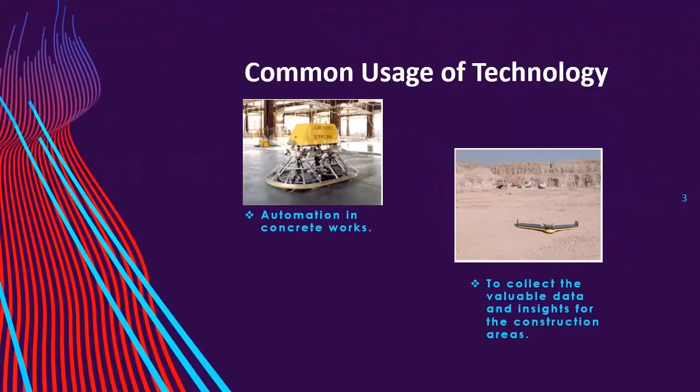Robots and drones are commonly used for automation in concrete work, covering the laying of concrete, post-laying leveling, removal of water from the surface, and final floor finishing. Besides that, the implementation of drones in construction is able to collect valuable data and insight for construction areas.

It is a significant tool that tracks the progress and condition easily and quickly. A 3D image of the project will be generated, bringing advantages to clients and architects who are able to utilize drone data to navigate the 3D site before the commencement of construction.

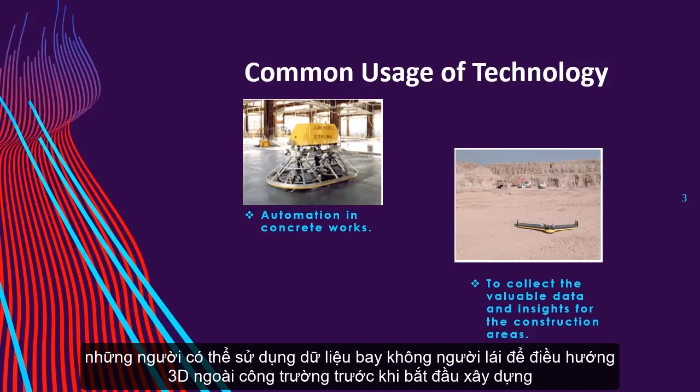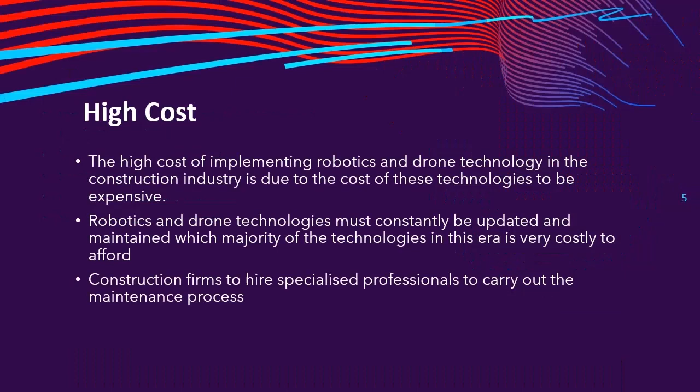There are several threats identified for usage of robotic and drone technologies in the construction industry, such as high cost for training programs, maintenance and recruiting skilled workers, technological adoption difficulties, security and privacy issues, climate, and incompatibility of the technology. High costs: the threats of implementing these advanced technologies in construction industries include the cost issue.

They consist of numerous cost problems, for example, high cost to train the workers. Besides that, robotics and drone technologies must be updated to the latest version and function in order to obtain better quality in the end results.

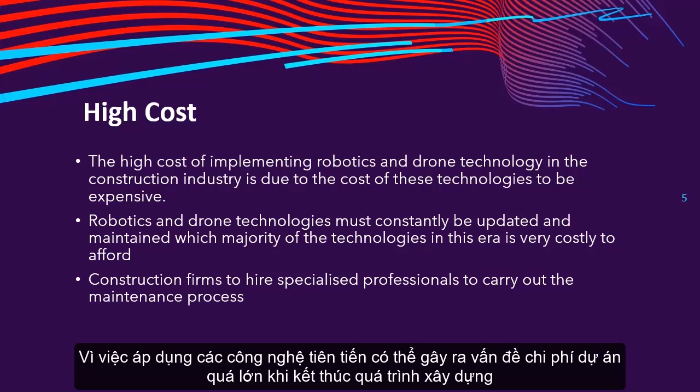The maintenance cost will be very high because repairs require special technicians, and it may not be affordable for every company. Therefore, companies without extra budgets have to think over before purchasing, as the implementation of advanced technologies may cause project cost overrun at the end of construction.

Technological adoption difficulties: robotics and drone technologies are very tough to operate and to understand. Robotic technologies are sophisticated to operate, particularly in the programming technique and their integration into construction activity.

Security and privacy issues: despite the capability of AI to strengthen security, it is also a prime target for hackers, cybercrime, and privacy violations. This is a critical issue with huge economic and financial implications. Besides that, the safety of construction workers can be compromised, which can lead to accidents or loss of life.

Climate: high wind speed will affect the controlling of drones, especially smaller drones. High wind speed may cause drones to be unable to capture higher quality pictures, as the drones are not very stable. Moreover, some drones are not waterproof and cannot be used during raining time.

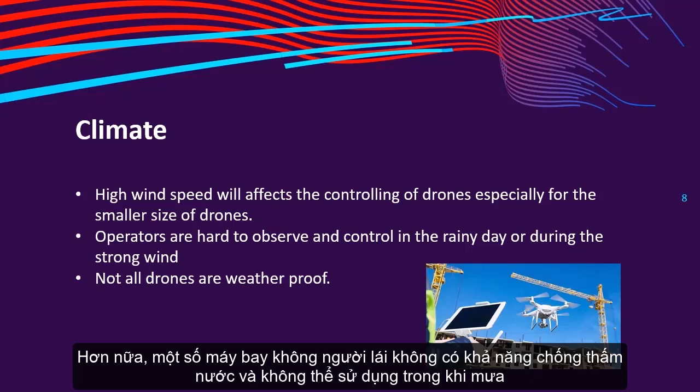Incompatibility of the technology: some automation and robotic technologies intended for on-site application are not easily understood. To make workers understand the operation of robotic technologies, training and retraining of workers becomes compulsory to upgrade skills for semi-skilled workers and increase their knowledge of robotics. This will cause an increase in time and cost for the contractor, which will bring a negative influence on project performance.

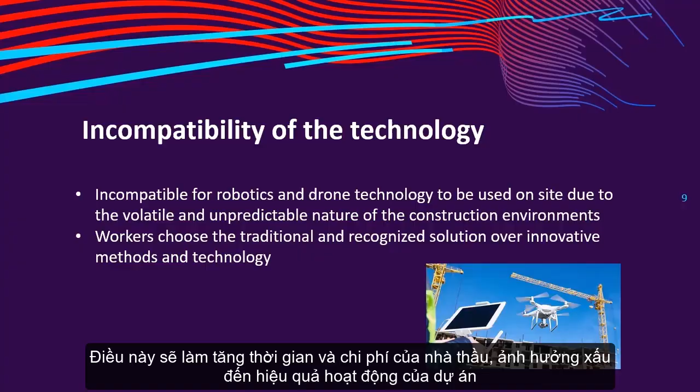There are several opportunities based on usage of robotics and drones in the construction industry, such as achieving the lowest possible cost in construction, creating innovative design, and reducing safety problems in construction.

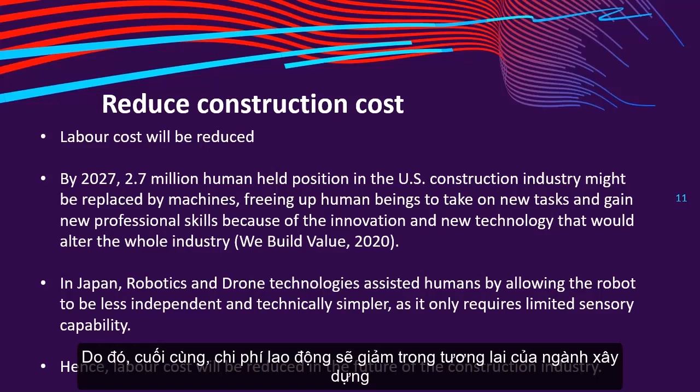Usage of drones and robots will reduce construction costs significantly. According to We Build Value, by the year 2027, 2.7 million human-held positions in the US construction industry might be replaced by machines. In Japan, usage of robotics and drone technologies is becoming less dependent on operators and technically simpler, as it only requires limited sensory capability. Therefore, eventually, labor costs will be reduced in the future of the construction industry.

Innovative design: implementation of robotics and drone technology in the construction industry will improve the design of buildings in the future. Design of buildings will be smarter with the development of the hexagon geosystem. This system, developed as a structural monitoring system, can use sensors to detect the strengths and weaknesses of a given structure that would otherwise not be visible to the naked eye.

This system will also help assist workers in predicting structural problems before they occur, allowing the site owner to bring in the appropriate team to perform necessary maintenance before the site becomes dangerous, reducing safety problems in construction.

Surveillance for security is very important in the construction industry, especially on site. Surveillance tasks can be carried out by robots, increasing efficiency, resulting in significant labor saving and better management of staff safety. Integration of drone technologies with the positions of personnel and machinery will help reduce accidents at the construction site.

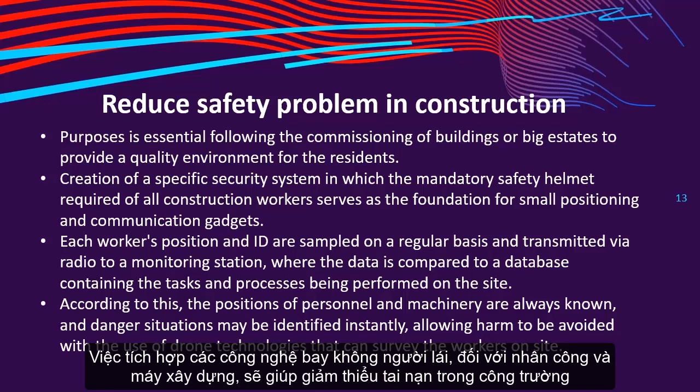Let's look at the implementation of drone and robotics technology globally in the construction industry.

Singapore uses construction robotics in the construction industry. Robots are being used for professional cleaning systems, inspection and maintenance systems, and dismantlement systems in construction. Robotic technology will be able to diminish the dependence on unskilled and skilled workers operating complicated construction machinery, and will streamline and further improve the present construction process for a shorter project period and guarantee quality consistency.

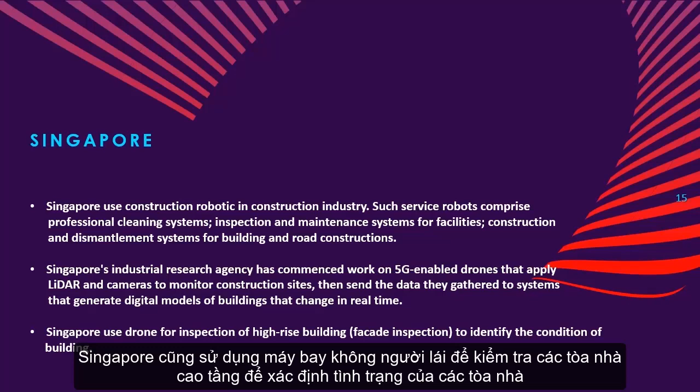Singapore's Industrial Research Agency has commenced work on 5G-enabled drones that apply a system called LiDAR and cameras to monitor construction at the site, sending the data they gather to systems that generate digital models of buildings that change in real time. Singapore also uses drones for inspection of high-rise buildings to identify the condition of the building.

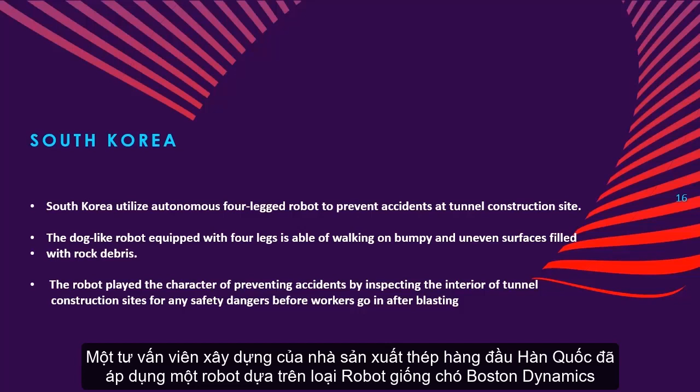South Korea utilized robots to prevent accidents at tunnel construction sites. A construction affiliate of South Korea's top steelmaker has applied a legged robot, based on Boston Dynamics' dog-like robot, at its tunnel construction site to inspect for cracks and construction faults that could lead to accidents.

The robot plays the role of preventing accidents by inspecting the interior of the tunnel construction site for any safety dangers before workers go in after blasting. The dog-like robot, equipped with four legs, is able to walk on bumpy and uneven surfaces filled with rock debris.

The introduction of smart construction technology, such as unmanned robots and drones, will enhance work efficiency and supervise the safety of workers at the construction site.

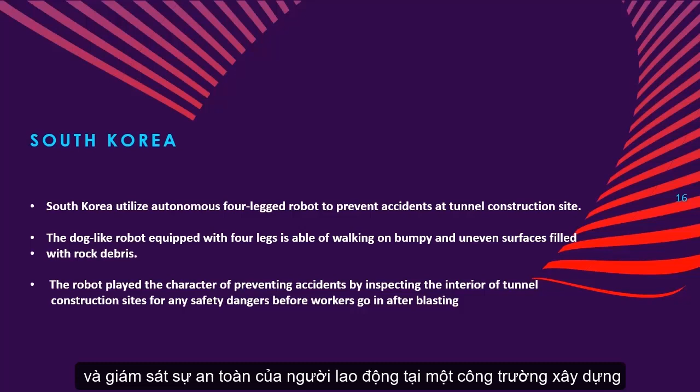Japan is the world's leading robot producer, producing 47% of all robots worldwide. Shimizu Corporation invested 3 billion yen in developing construction robots over the past 3 years.

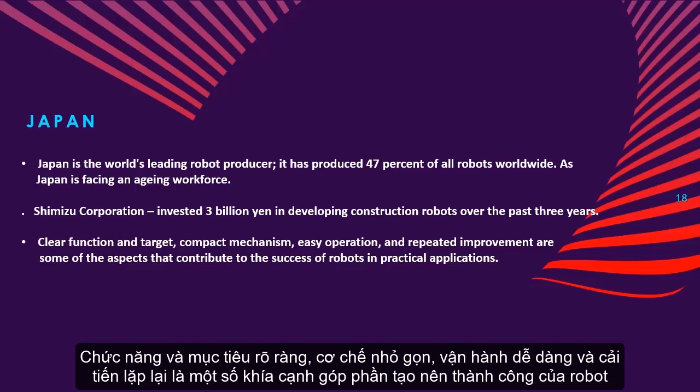Clear function and target, compact mechanism, easy operation, and repeated improvement are some of the aspects that contribute to the success of robots in practical application in Japan.

Now let's watch a video clip using robots and drones in the construction industry.

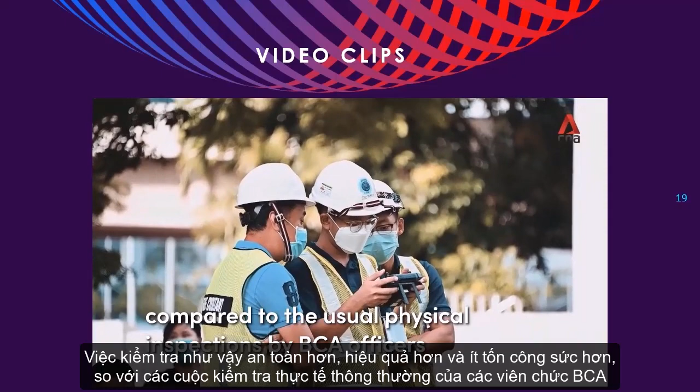Currently, facade inspections are pretty much done by our inspectors who go out to site. We are physically on the building maintenance unit or the gondola, carrying out the physical inspection.

In the past, when you compare the inspections to the way we do it now, we didn't have this 100% visual inspection. We would do the physical inspection, and from that physical inspection, we would get the defects. Now, with the new requirements, the requirements stipulate that you need to do 100% visual inspection.

To do the 100% visual inspection, you could either use drones, or you could get one of your team members to actually take a camera and capture images of the facade from different locations and different angles, depending on the height of the building.

The savings in time using a drone is going to be far more than having our facade inspector or facade consultant standing at different positions taking images. The accuracy is going to be enhanced as well by using a drone.